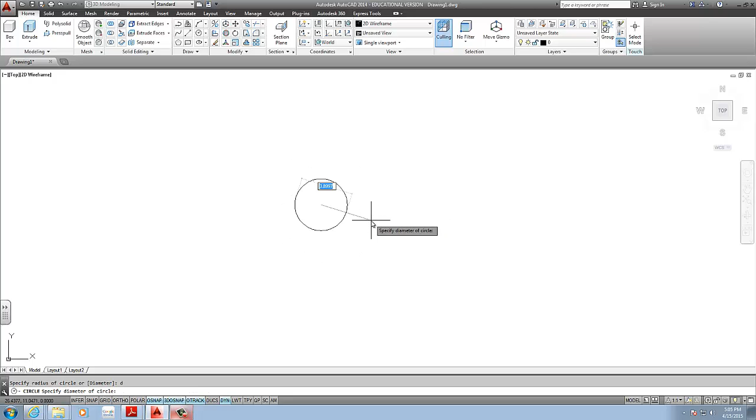So I open up a new drawing, and basically what we want to do is create that overall shape of the part. We start with the circles, with the inside circle being the diameter of 20. This is all millimeters, so if you need to change your units, go ahead and do so.

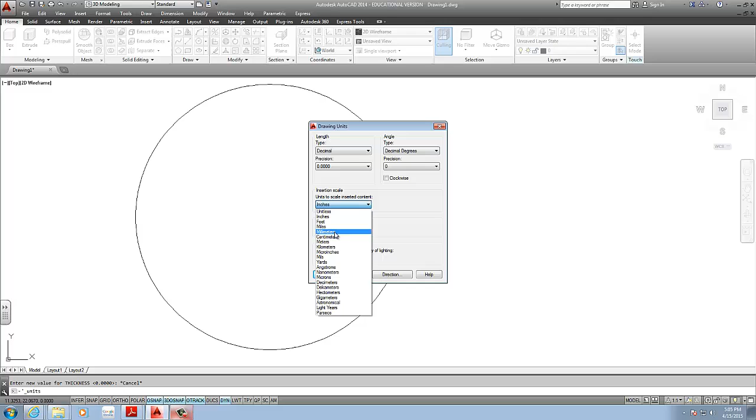To do that, you go into Format, Units, and you make sure you're in decimal. We're in engineering, go to decimal, and I convert it to millimeters. Next, click OK. So now if I actually draw my part, it will be to the specifications. 20, and now if I want to rotate, I can rotate it later on.

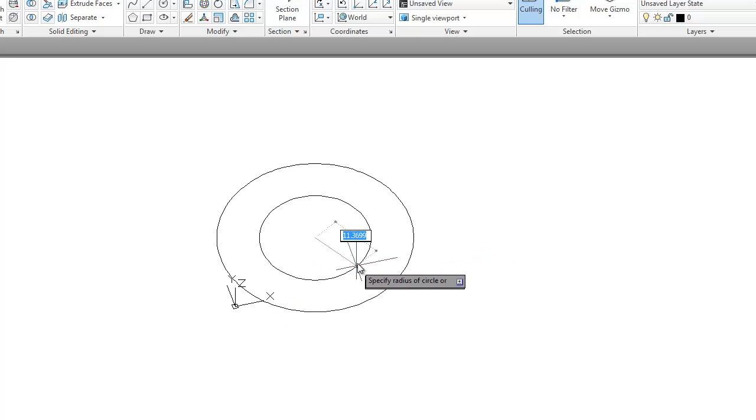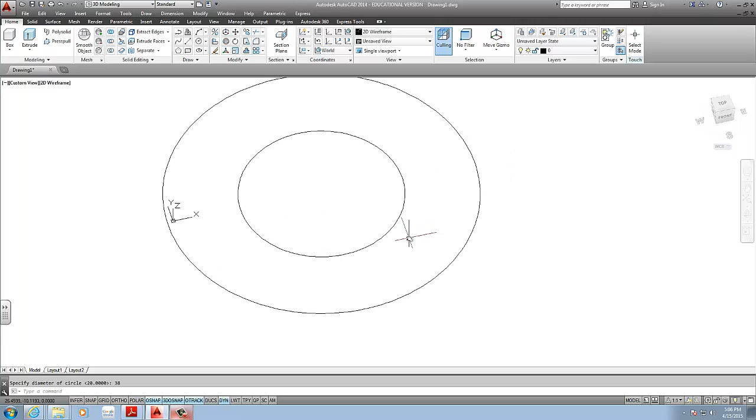This one's the inner circle, diameter is 20, the outer is 38. Okay, here's something wrong. Circle. D-enter, this is the inside, 20, and then D-enter 38. So I have those 2 circles, that's going to be one part.

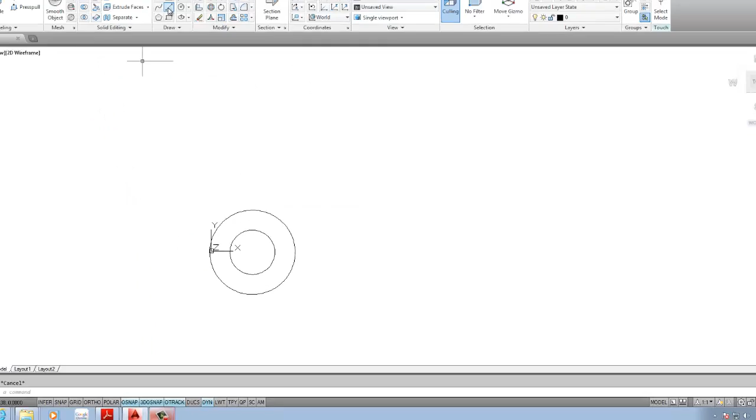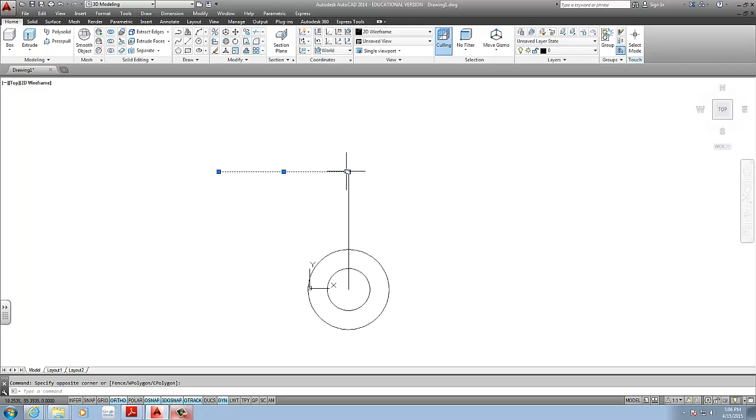Making sure quadrants is on, I select the quadrants here, and I'm going to figure out what angles this is. But before I do that, I might as well create a reference line from the center. Let's see here, top view. I have a line that's vertically at 66 minus the thickness, which is 56. So if I draw a horizontal line at that point, that will be my reference.

So here is my bottom. I created a 20 inside diameter, 38 outside diameter, and I took this 66, I subtracted the 10, and I got the bottom of the base. Next thing is I need to create these 2 angles. Now to get that information, I have to verify. Oh geez, it doesn't specify.

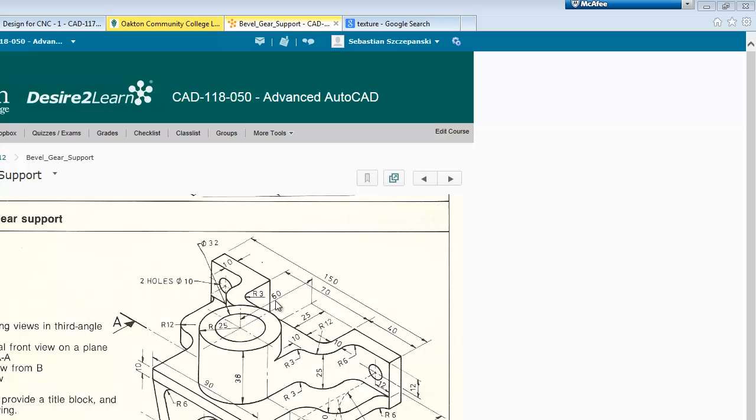So looking at this drawing, we see a 60 to the center, and this center is the center of the circles. And if the total is 88, then we know our first from the edge to the center of the circle is going to be 28. So we go back to our drawing, we create a line from the center across 28, and we hit the quadrant. So I have my first side complete.

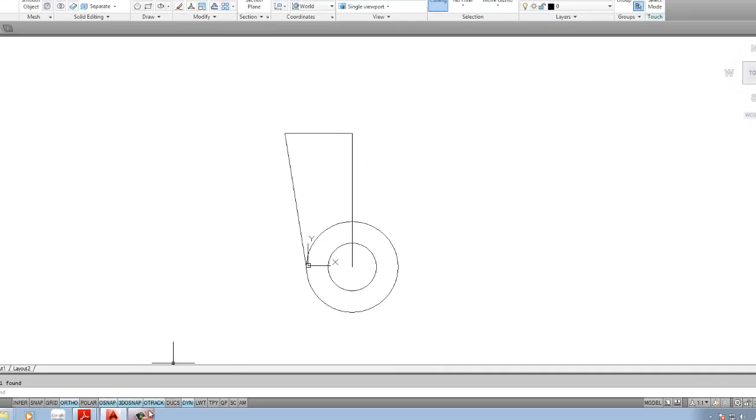Then I have to figure out my second, which may be exactly the same, or it might be different. So for the other part, we're just going to make it equal. So we use the mirror command, and we mirror it over. I can stretch this horizontal line to enclose the part. So here's exactly what I created, and now I can make it into a 3D object.

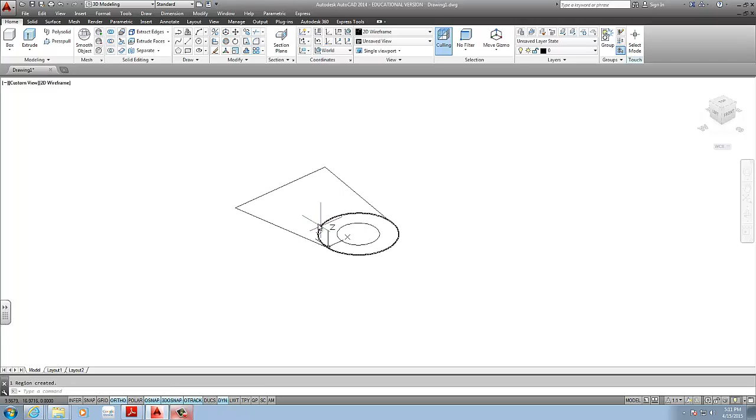To do that, there's a few different options. One simple way would be to create a region of this material here, which is going to be probably my best bet. So I'm going to go to Draw, Region. I select these 3 parts. Should create a region. Now if you don't see a shaded area, it's because you're in 2D wireframe, and you can change it to conceptual.

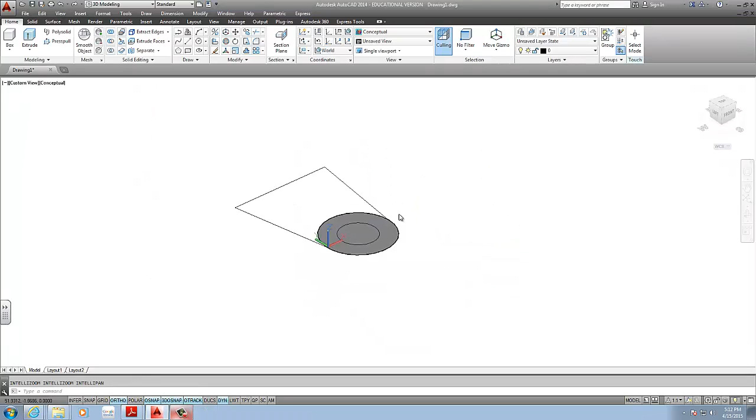Now as you can see, the region selected this area here, which is incorrect. So I'm going to undo this, if my computer allows me to. And before I do the region once more, what I need to make sure is that I cut the exterior circle first. So I'm going to trim this out. So trim, select all, enter, and remove that.

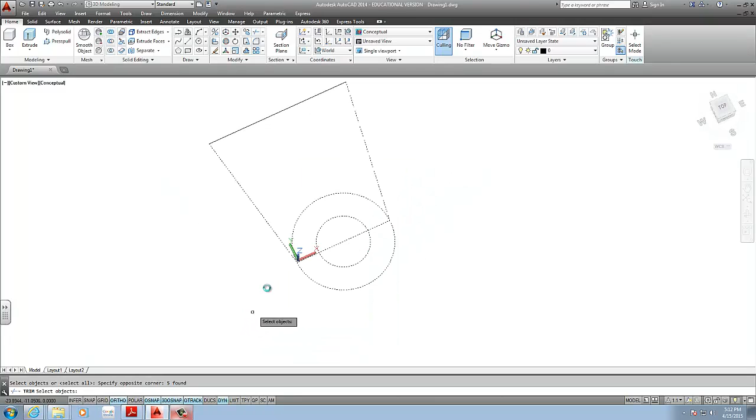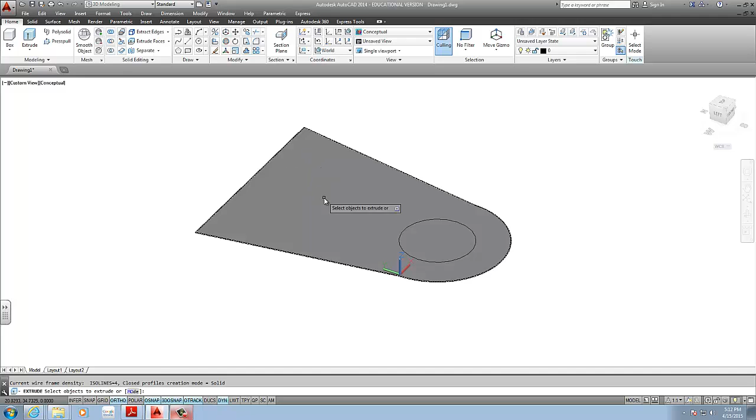Then I can finally do a region. Either type it in or you can go into draw region and select this entire object. Now it's okay if I select the entire object including the circle because I'm going to subtract it out later on. From there I can do the extrude, and the thickness of the inside material is 10.

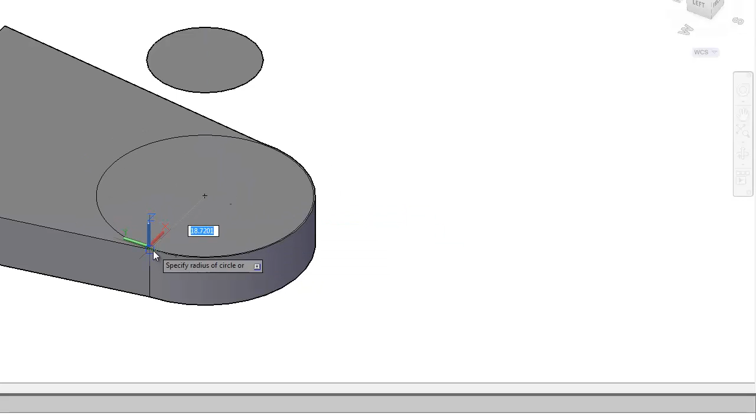Move it down actually. I have the inner circle, which I'm going to later on cut out, so I'm going to move that up using the gizmo, and I'm going to use that later as well. Next step is I need to get the circle here, which I hover around, make sure I select the center, and I'm going to extrude the circle at a distance of 3, and that's on both sides, so you can easily just copy it over from using the center points on both, or you can use the quadrants to make it simpler for yourself.

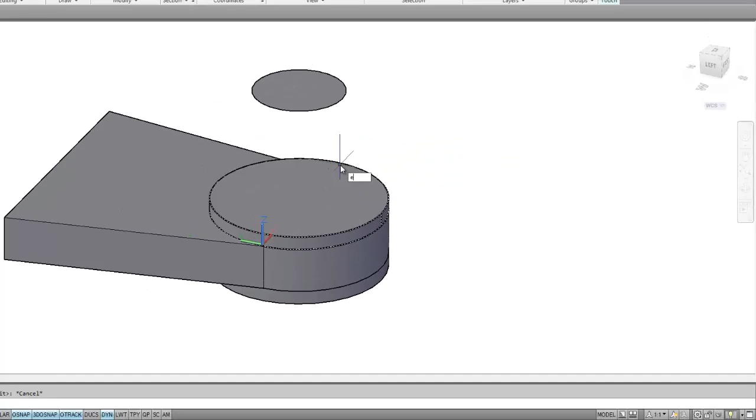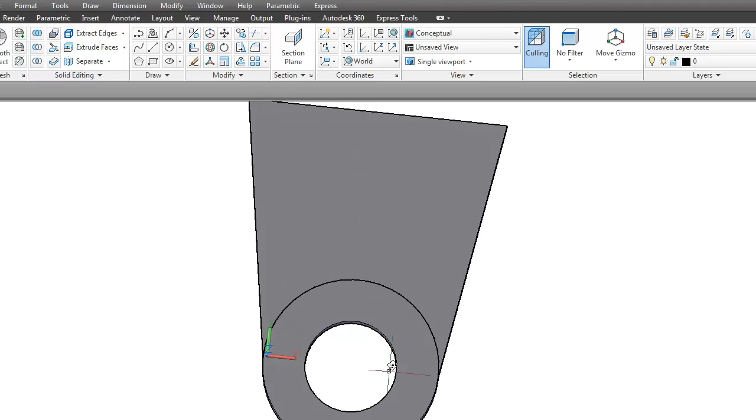Next part is I extrude out the center circle that I just created, and I can use the subtract command. But before I do the subtract, I want to make sure I union all these parts. So I union that, and I go into my subtract command where I subtract this, giving me the final solid part. So this is the lower wing.

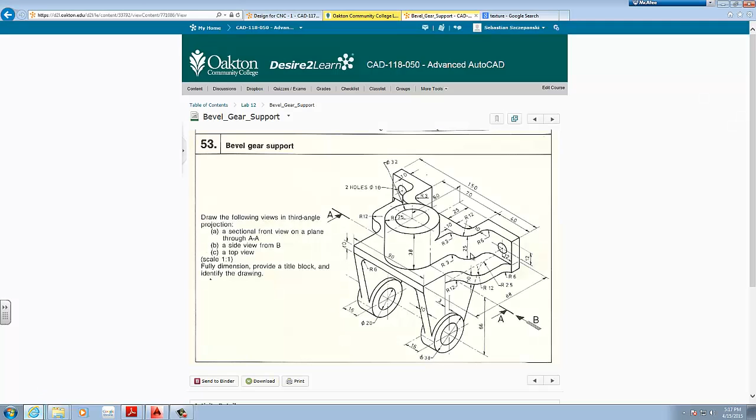From there I move into my base. So once this component is complete, what you can do is still work on the top view because we're going to rotate them around later on. So I'm going to go back to top view, and I'm going to be creating the base. Now there's one thing we don't know about this drawing, is if the back is actually open all the way through or not, but we can decide that later. I believe it's open all the way through, so we'll do open all the way through.

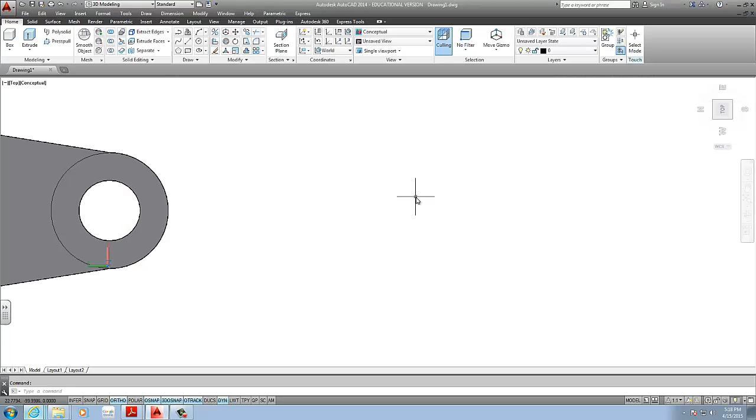So now I need to do this outline here. The most difficult part will be this area here with the fillets or curves, so we'll work on that next. I'm going to start with the 90 here, which is the vertical, move up the spacing here, which is 28, and then we're going to start creating this lovely drawing here. So if I looked at it from the front view, I'm going to do a quick 90. I'm going up at a distance of 28.

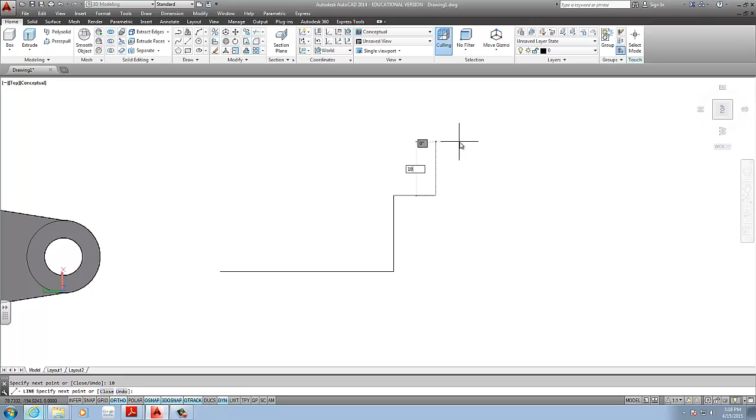Now looking at the radius, I may need to increase. This will be 12 and 12, and then 10 and 10. So every time you have a, oh, that's not 12 and 10. Every time you have a radius, you do double. So you do 12 and 12. And there's no specified distance, so I have to make sure I do a copy of my overall, so that way I know what size I'm making the whole object.

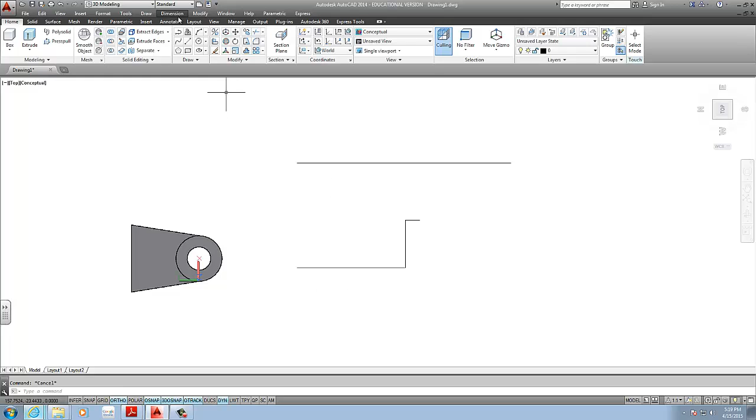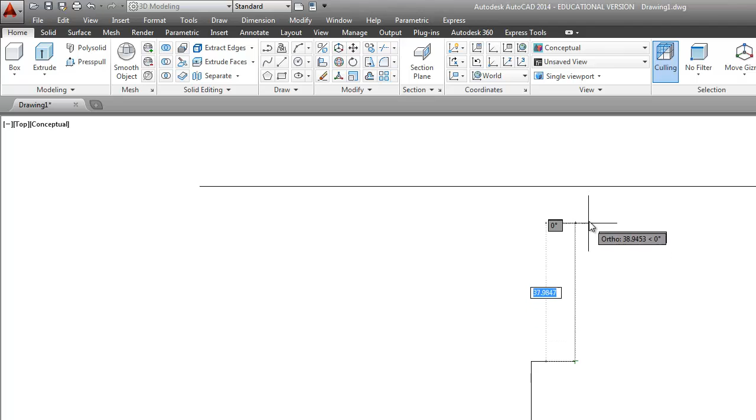And this is 88, so let me put that dimension in there for you guys. That's too small. So this is going to be 88 total. I did the 28, I did a 12, 12, and looking at the drawing here, this is going to be another unspecified distance. I'm not sure how long, so I'm going to leave that, but I'm going to use a line as a reference, as well as this back line is going to be 150, so I might as well create that. This is 150.

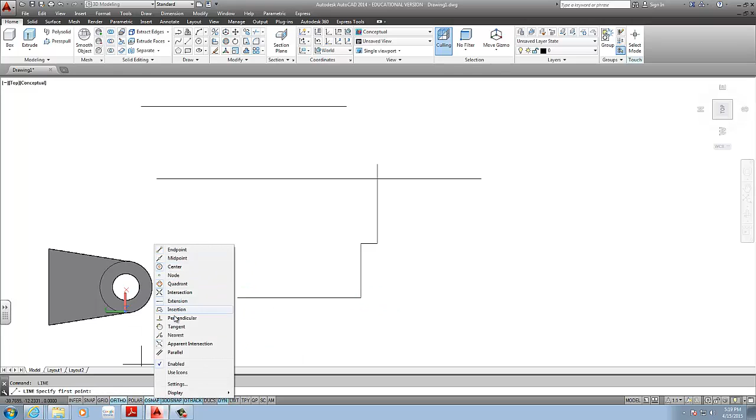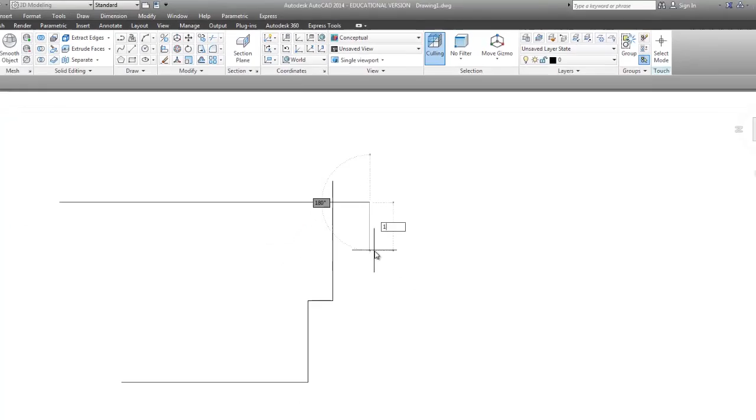I use a midpoint as my reference, so I'm going to use a midpoint to 88, and I'm going to create, and that's my back line. So my back line is 150, my front is 90, and my distance apart is 88. So that should help me with this area here. So once I have that, I'm going to have to figure out exactly how to get this to match here. Whereas the thickness of the back is 10. So I'm going to use that as a reference.

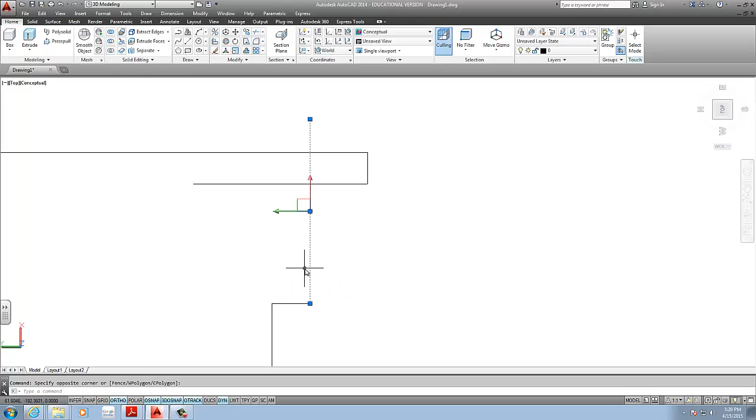And there should be a fillet here in addition to a fillet this way. 12, 12, 12, 12. And there's two more 12s. 12, 12. And that's where it connects it. Now I can trim that off.

That's how I get my shape. You'll see as I do the fillets, you'll see how it gets resolved.

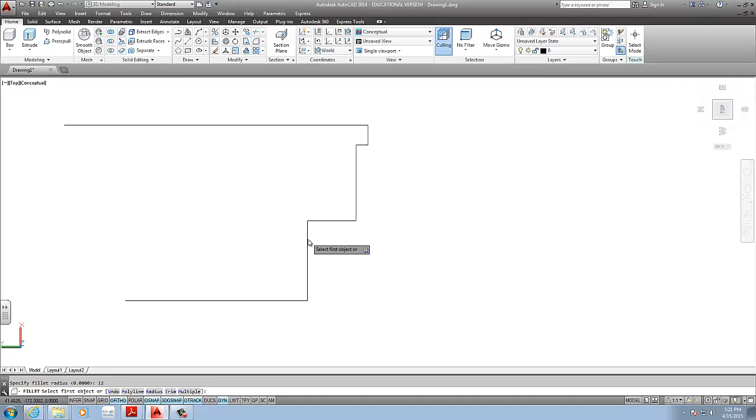So I go into my fillets. I have the radius of 12. So every time I had a 12, I did a radius. And this last one is a radius of 6.

Now I could tell you the exact dimensions for all of this, but this would be too easy. But here's a reference how I did it. I just designed the lines and then I added the fillets.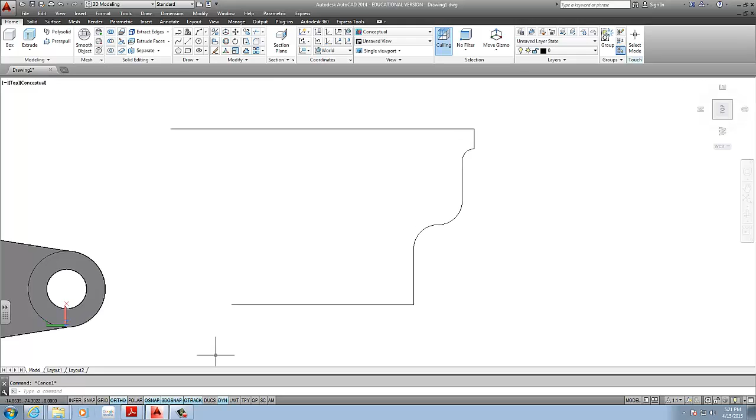So in reference to that, you look back into the drawing, you draw a vertical line here that is 12, across 12. In addition to, since it's another turn here, you need to give the radius of 12 again. So it's actually 12, 24, 12, and you go all the way down up to this edge, and then you do a fillet here of radius 6.

And that gives you that entire curvature. Now the nice part about this is the other side is exactly the same. So all we need to do is mirror it over, and that gives us the overall shape.

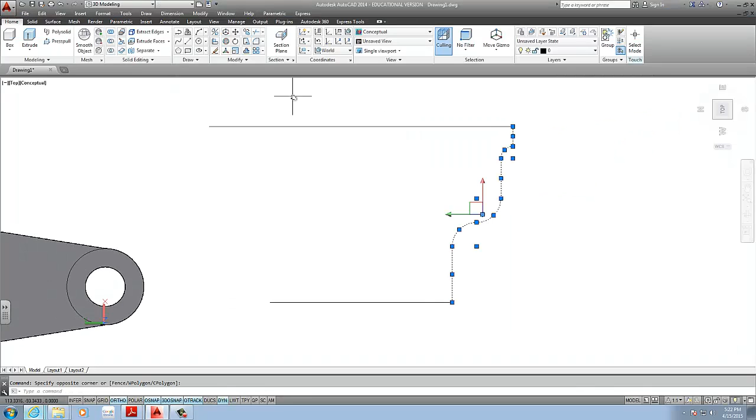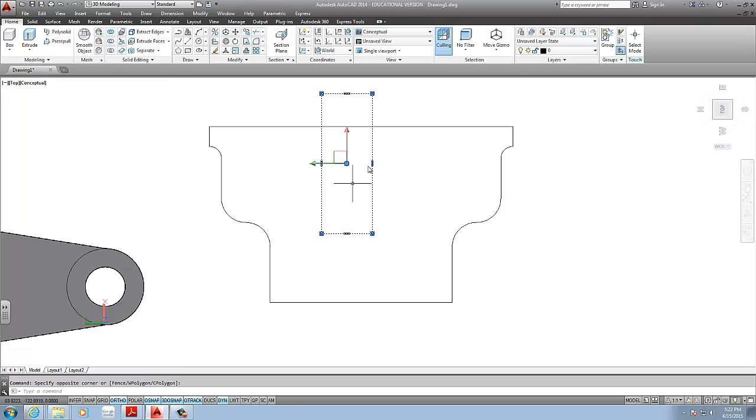Rotate it around. Move it based on the midpoint to midpoint. And the only thing I have to worry about here is there is a radius on this edge here. So it's the radius of, again, 12.

So I do a fillet, 12, fillet, radius 12. And when you're happy with that, you just trim out the excess, giving you the final structure.

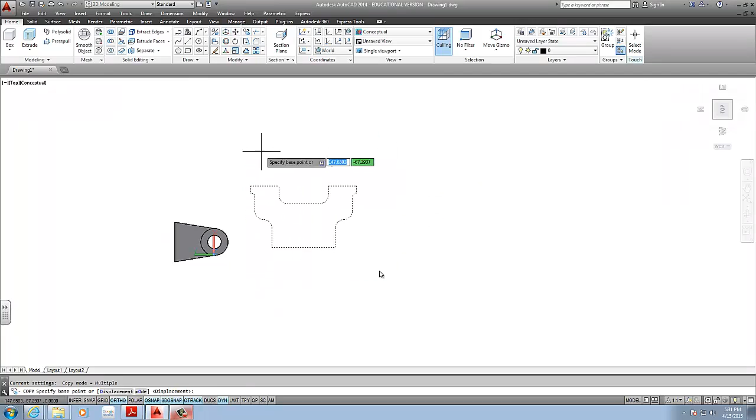Once you have this complete, your next step would be easy. I would recommend making a copy of it because we're going to use that for a flange. From here we use press pull.

Pull, I select, pull, select that, and their thickness is 10. So that gives me one piece, second piece, and now I'm going to be working my third.

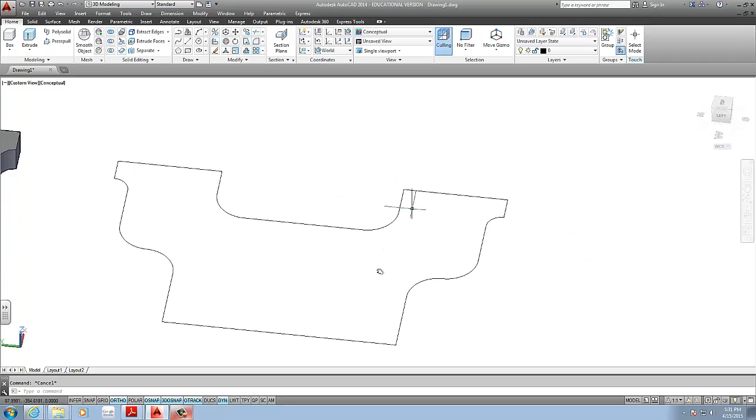Third one is just an offset up the back. The only problem here is that, actually going back to my drawing, the radius here is incorrect. I should have changed it. It's supposed to be 3 instead of 12.

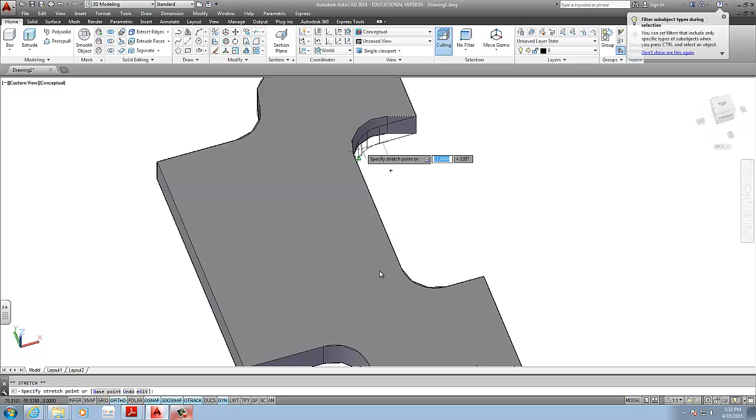So if you're doing that and you're ahead, that's great. If not, I won't be able to edit it. Should have had the history on. But you can undo, of course, and fix it pretty fast.

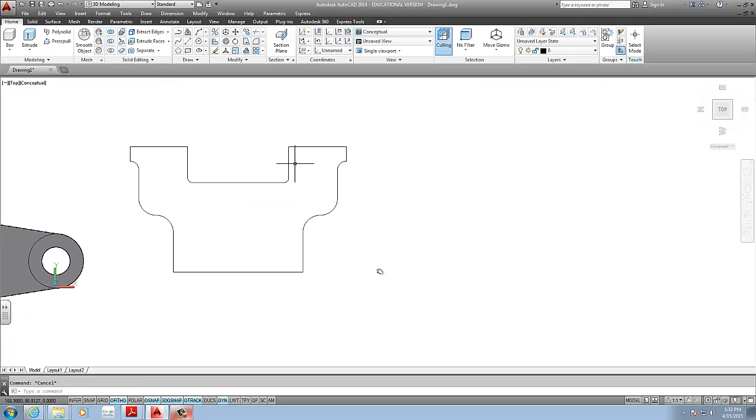So I do the fillet and do radius of 3, like so, and of course copy it over like I just did.

I do the press pull 10. Second part is I remove the unwanted parts to this so I can do the actual offset. So I remove everything except the whole back. From here I use the offset command, so I go into offset, and the offset distance is 10.

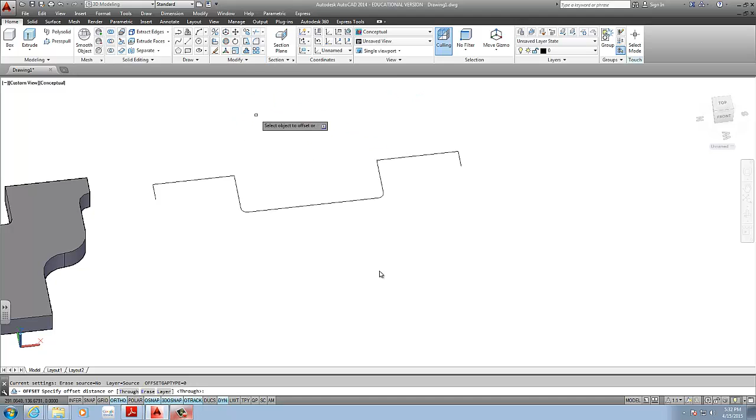The actual fillet here may change, so you gotta keep that in mind. And there's also a fillet here. So we'll start with the inside fillets. We go into fillet, radius is 6.

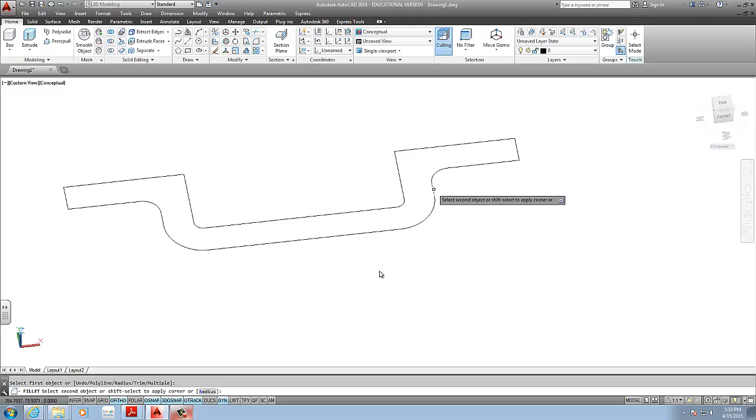Both here. If you want to check what the radius is for this, you can click on your mouse and do a quick radius. It's 13. Nope, we want 12. So we actually have to change that. Fillet, radius 12, and we fix that like so.

The older versions of AutoCAD, you would have to remove the previous drawing. Once you have that complete, what you do next is you actually can extrude it out. But looking at the drawing, I realized that we'll have to work with this piece here.

So it's up to you if you want to add that in now, do the two cylinders now, and extrude it all together, and then add the top material, or do this separately, which may take a little bit more work. So I recommend doing it right away.

So instead of extruding it out, I'm going to go and create these two circular cylinders. So using a construction line, I'm going to create a point which is from the back. So from the back it is 60. That's my center of my circle.

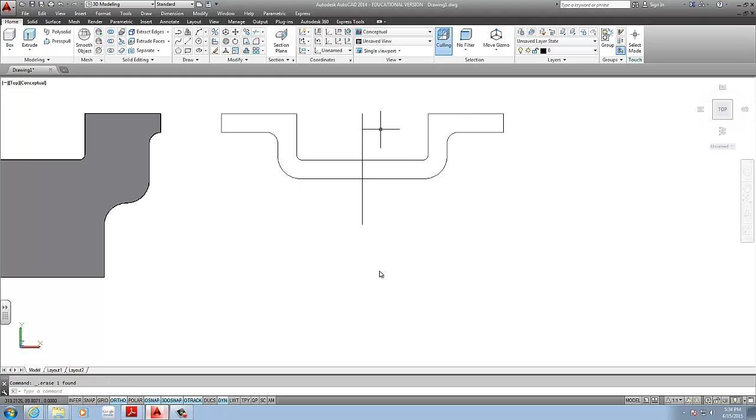I usually delete any reference drawings so that I don't get confused. The radius for this circle, so circle radius, which is our default, is 25, and our interior circle was a diameter of 32.

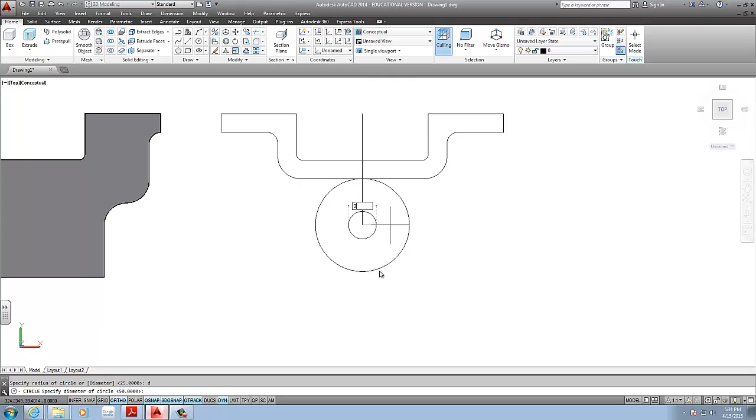Now we have to add these two lines here that are from the quadrant, and you trim out all the unnecessary material.

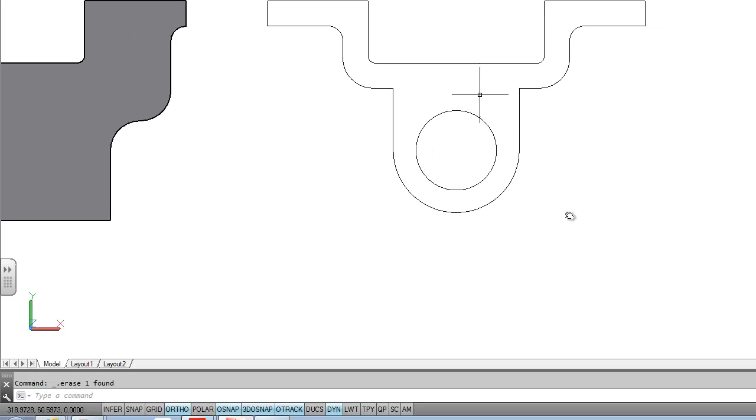And a reference line. So your overall object is like this, and again we can use press pull to extrude this out, but we're missing one fillet right here. This is too sharp, so I'll go back into this and fillet that out, which is radius of 3.

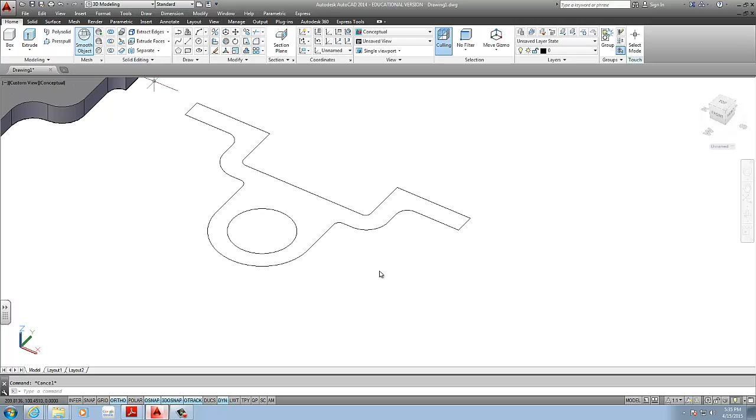So that looks pretty much clean. There are no fillets at the back, and I'm happy with that. We can go with the press pull.

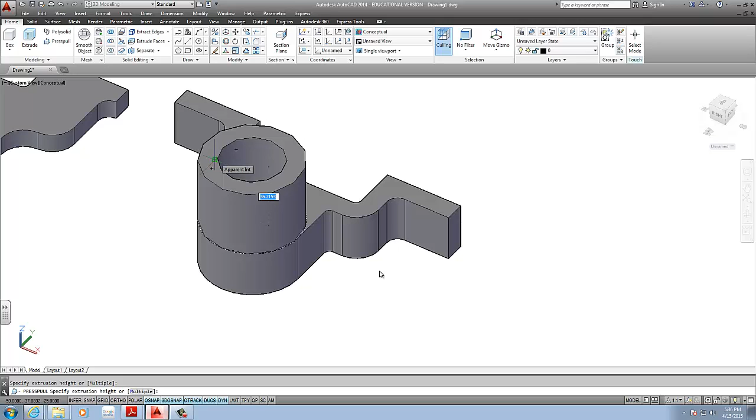The height is, for this part, 25. It's going to be 25, and then we also have to create the second part, which is going to be the higher cylinder at the center. And that's pretty simple because you just trace over the two circles, and you can do the press pull at a distance of 38 minus 25, which is 13.

And finally we place this underneath and these under that, and we still have to cut the hole for here to make it all the way through. That's if we want to. The drawing doesn't specify that, but I'm assuming it wants us to do that.

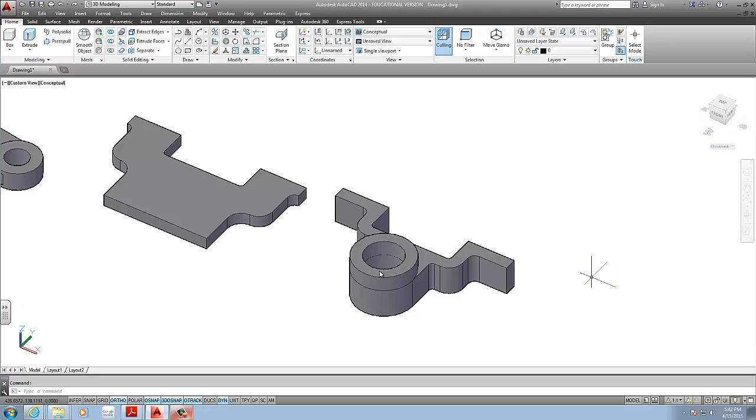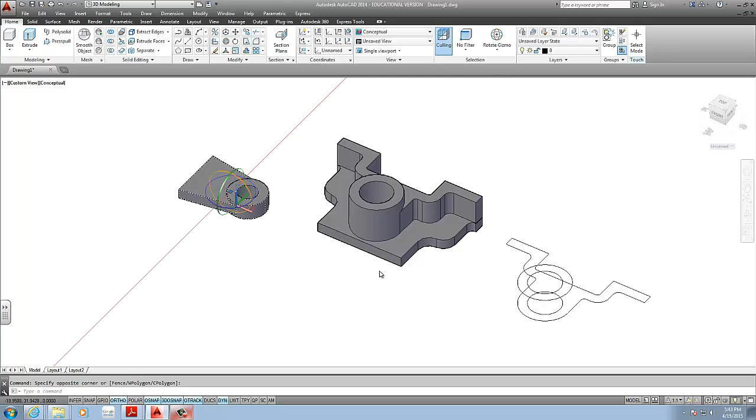Next part is you would take this wing. We can do a rotate gizmo, where we rotate over the x-axis, I believe, and we place it in position. Again, you place it using the corner points, since those are the easiest to snap to. I also make a copy of it from one corner point to the other to finish my overall design.

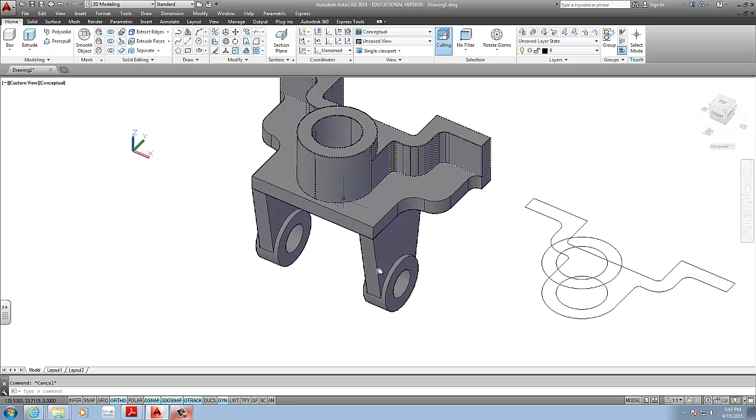Now, in addition to this, if there is a fillet, you may need to do that. So to do the fillets that we see on the drawing here at the bottom, we will actually have to union all these parts. I usually prefer keeping a copy of this.

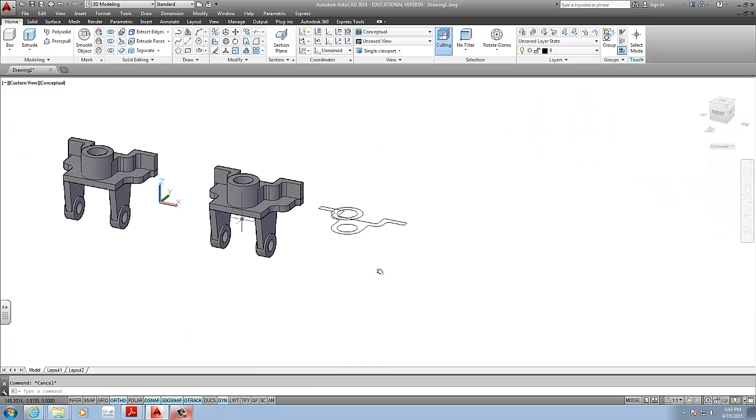Oh, here we go, computer's slowing down. Just in case I need to go back into it and make any adjustments, because once you union it, it's kind of hard to go back.

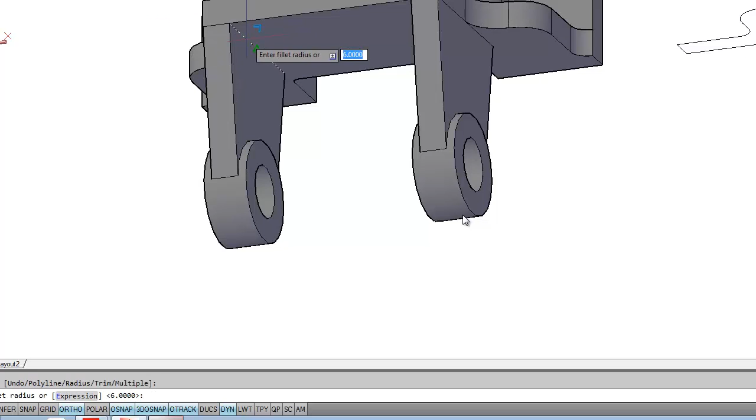So you select the entire object, you click enter, and you end up with one piece where you can now add the fillets. Do the first fillet, the inside of radius is 6. I select this edge here, and I can do the other side as well.

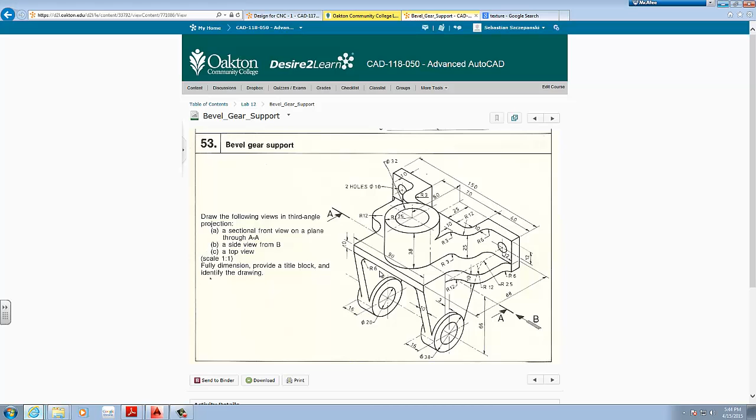Give me a nice filleted radius, and we have one more radius at the back. So if we look at our bevel drawing here at the back, there is a radius of 25, and from my understanding there's no other radius that we need to worry about, so this would be the final step of the project.

Go into fillet, radius 25. Now this may be an issue. Oh no, it looks good. And other side as well.

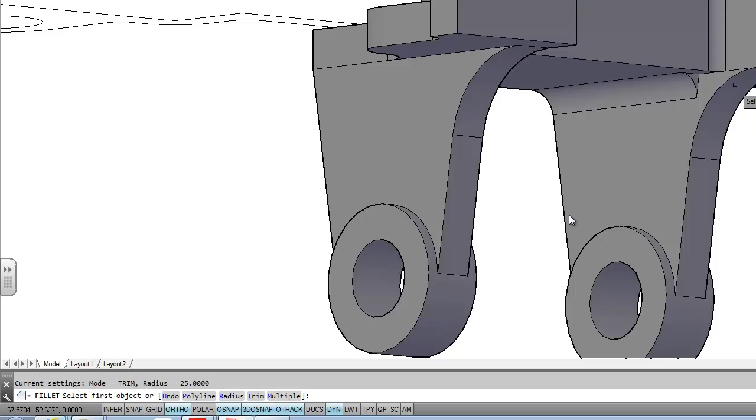Now again, there is an issue. As you can see, the fillet here does not extend all the way, so we may need to add that, or we do the back first. And probably the best step was to do the back first, but you can also add it after.

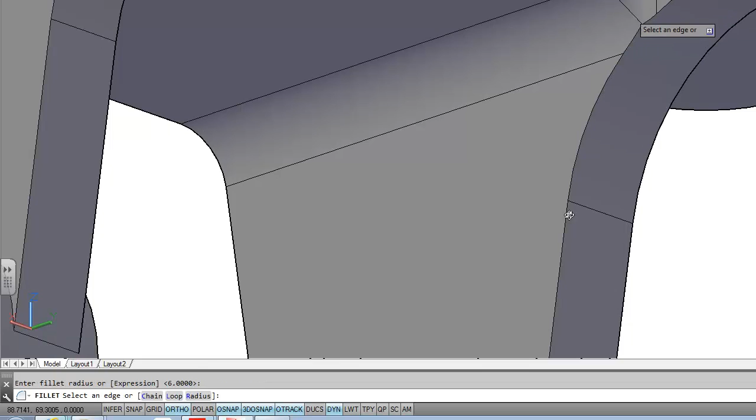So that gives you a lovely shape here. And finally, to make this complete, we also need to do that cut at the center.

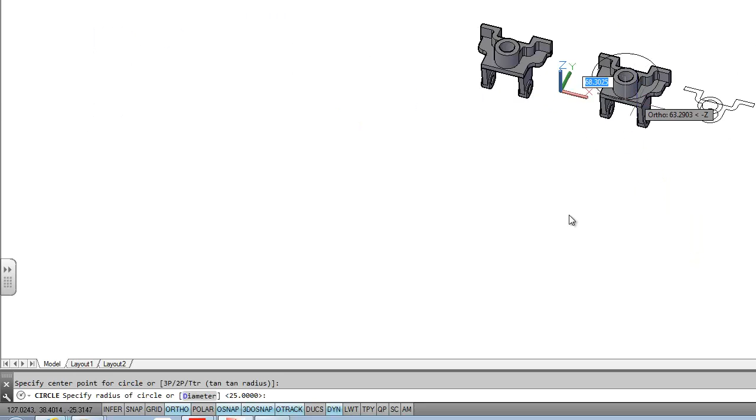So you can do a press pull. Oops, I'll probably have to draw that circle in here. Once more, snap it to the quadrant, and if I do a press pull going downwards, it should cut through. Oh, if it didn't, I just subtract it. Give me a cut piece like so, with the legs and everything, completing our beveled gear support.